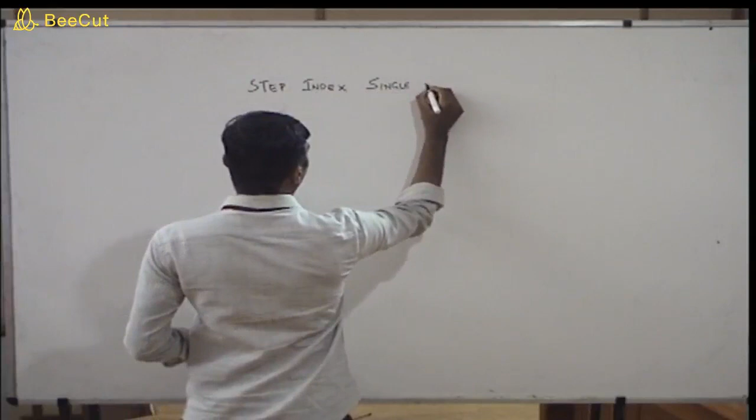Now, in this session, we are going to study about the light propagation through different types of optical fiber and the refractive index profile of the different types of optical fiber. The first one is the step index single mode optical fiber.

The core and cladding are the two basic unavoidable layers of an optical fiber. If you take any optical fiber, it will have a core and cladding, a core with high refractive index and cladding with less refractive index. So I'm going to draw the refractive index profile of a step index optical fiber. As I explained in the previous session, step index refers to the variation in how the refractive index profile varies when you move from the center of the core towards the core cladding region.

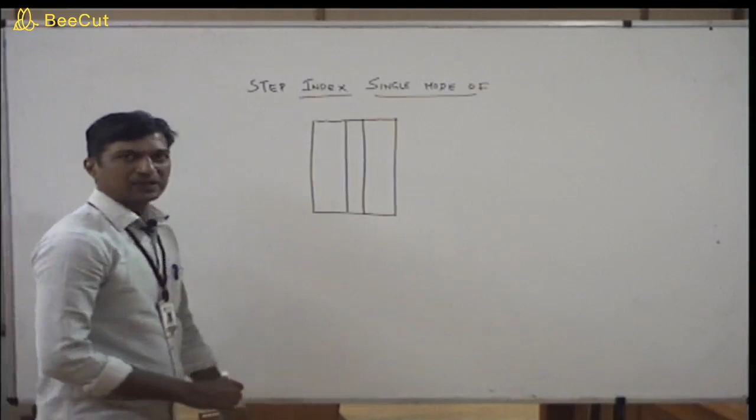I'm going to draw the structure of an optical fiber. So this is an optical fiber. The core and cladding are the two essential layers of an optical fiber because the guiding principle is based on total internal reflection. This is the core of an optical fiber, and the refractive index of the core is represented by N1. This is the cladding of an optical fiber, represented by the letter N2.

When you compare the core index with the cladding index, N1 will be greater than N2. Core is the higher refractive index region, and cladding is the less refractive index region. So this is the optical fiber axis, and this is the radial distance.

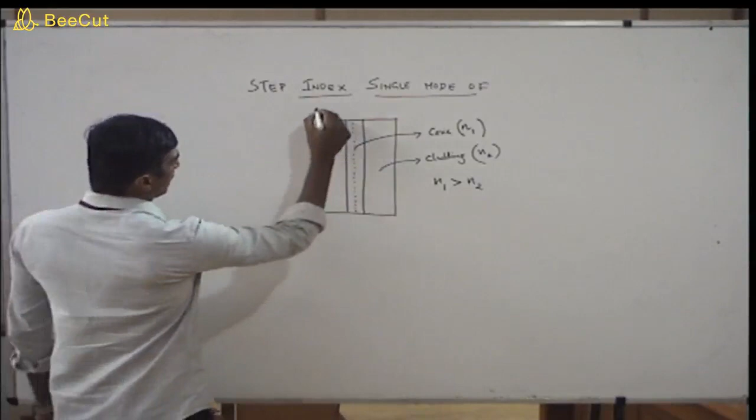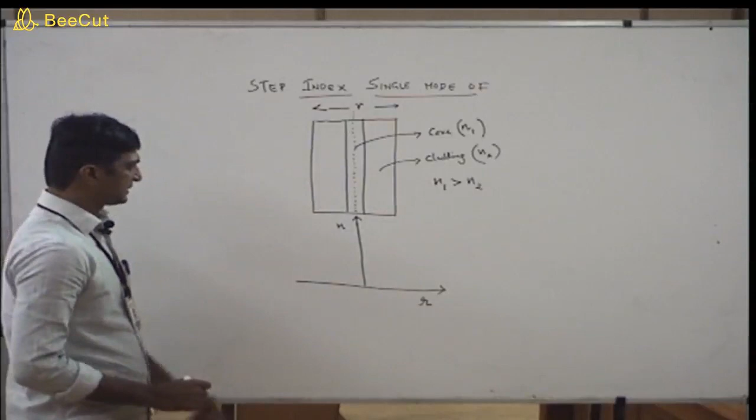Now I'm going to draw the variation in refractive index, how it varies if you move from the center of the core towards the core cladding interface and then from the core cladding interface to the edge of the cladding, for the step index single mode optical fiber. So I have an axis where radial distance is taken along the x-axis and refractive index is taken along the y-axis. This is my origin.

One of the features of the step index single mode optical fiber is that the core has uniform refractive index throughout. As an example, let the core index N1 be 1.5 and the cladding index N2 be 1.4.

If I move radially from the axis of the optical fiber towards the left or right within the core region, the refractive index remains 1.5 because the core has a uniform refractive index throughout. This is the core cladding boundary. So if I move radially from the center of the core towards left and right, the refractive index remains the same, 1.5. On the y-axis, I am going to take this point, and let this point correspond to 1.5.

So throughout the core region, the refractive index is 1.5. If I move towards left or right from the center of the core towards the core cladding interface, the refractive index stays the same, 1.5, so I get a straight line like this. Moving from the center of the core towards the core cladding interface on both the left and right sides, the refractive index remains uniform at 1.5.

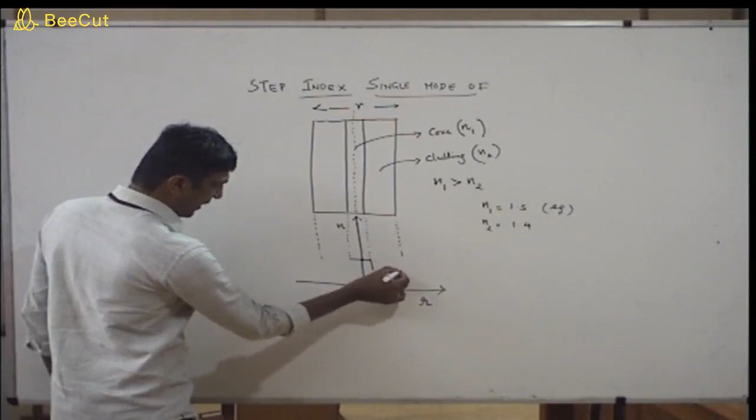Up to the cladding interface, it remains the same. So on reaching the core cladding boundary, the refractive index drops from 1.5 to 1.4. In the cladding region, it has a uniform refractive index of 1.4. So this point corresponds to 1.4, and throughout the cladding region, the refractive index remains 1.4. So from 1.5, it drops on reaching the cladding region.

This is the core cladding boundary, and this is the cladding region. Throughout the cladding, the refractive index is 1.4. Similarly, if you move towards the right, this is the core cladding boundary. On reaching it, the refractive index drops from 1.5 to 1.4, and throughout the cladding region, the refractive index remains the same. So this is the cladding boundary, and this is the cladding boundary.

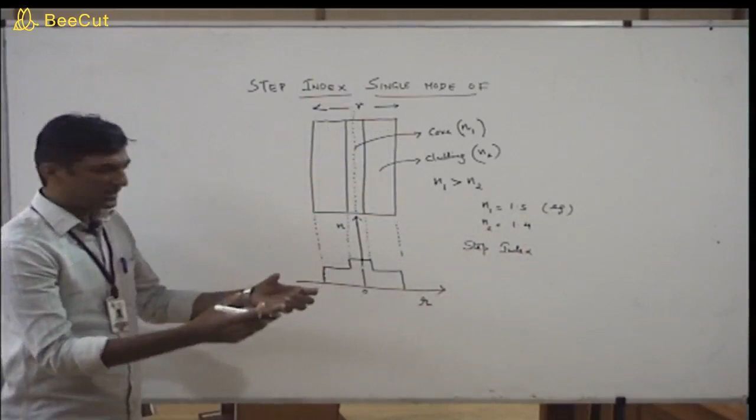So we can see the refractive index profile of the step index single mode optical fiber looks like a step, and hence the name step index fiber. That is the way the refractive index varies as you move from the center of the core towards the core cladding interface, and then from the interface to the cladding boundary. The variation in refractive index looks like a step, which is why it is called step index optical fiber.

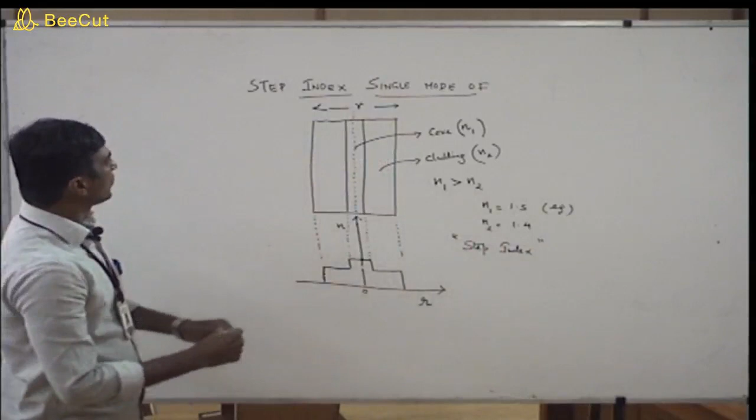And then we are going to study about the path propagation. Now we move to the next point, the single mode optical fiber. Again, we are going to see how light propagates through a single mode optical fiber.

Again, the same structure of the optical fiber. The core should have a very small core diameter. So this is the core region, represented by the letter N1, which is the core index, and N2 is the cladding index.

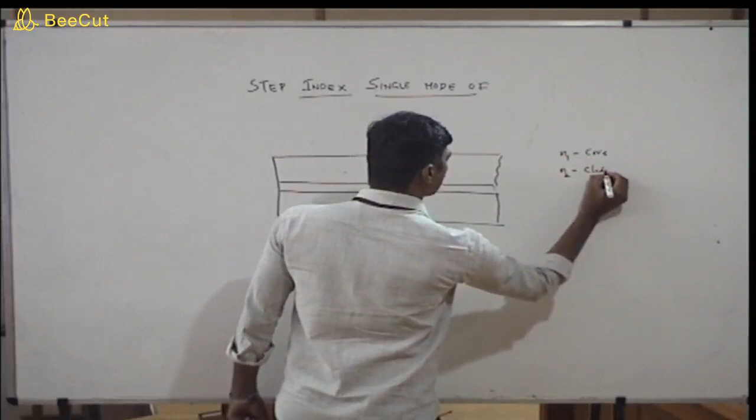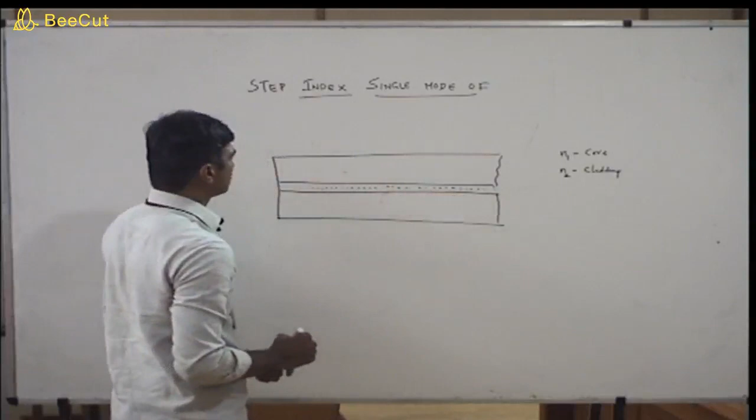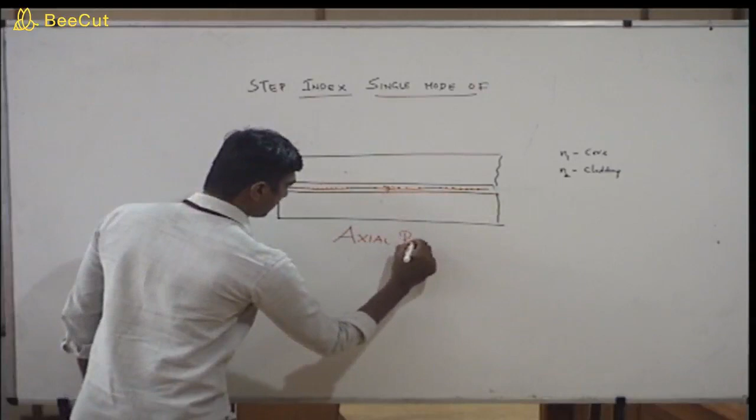This is the axis of the optical fiber, which we call the optical fiber axis. In the case of a single mode optical fiber, there is only one light ray path inside the fiber, and we call that path the axial path, or axial mode.

So this fiber supports only one mode, and hence the name single mode optical fiber. Just summarizing, in the case of a step index single mode optical fiber, the refractive index profile looks like a step, and the fiber supports only one mode.

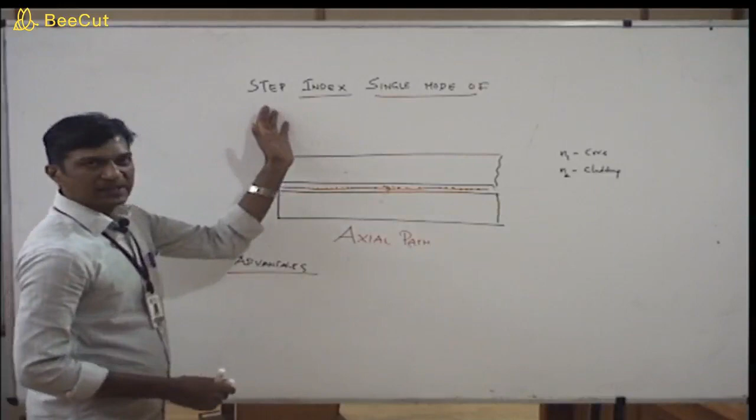One of the advantages of the single mode optical fiber is that it is used for long distance communication, for example intercontinental superhighway communication channels. We use single mode optical fiber because it does not have any significant losses. So we prefer step index single mode optical fiber if the communication channel is lengthier, for intercontinental connections, for the internet, and for the backbone of the internet.

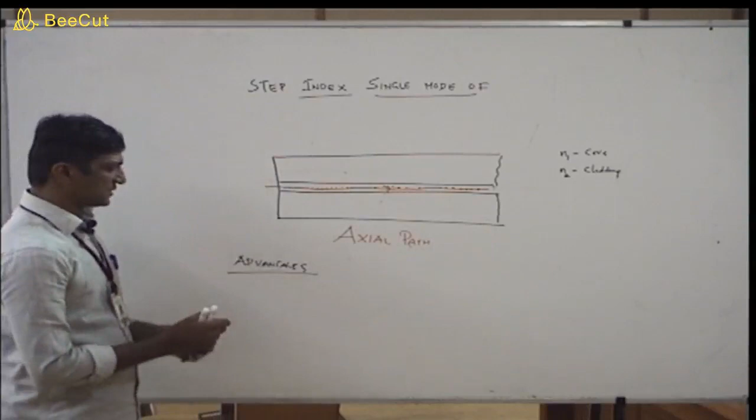Why is it preferred? Because it has low losses. The fiber has minimum losses, and we can transmit data at high speed in the case of a single mode optical fiber.

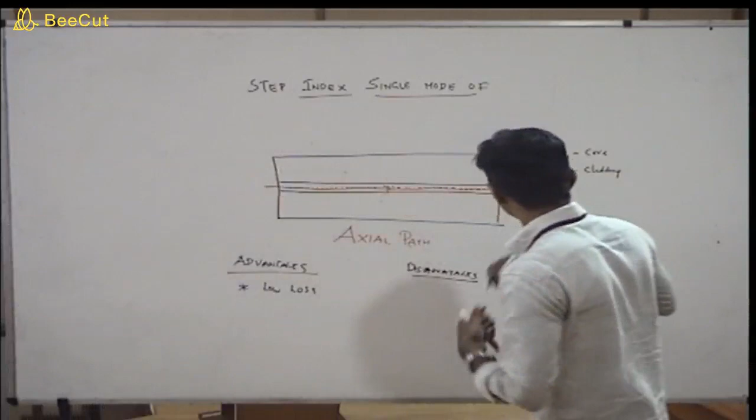And now the disadvantages of the single mode optical fiber. We know this fiber is characterized by a very small core diameter. I think I have not mentioned the core diameter yet - it is 8 to 10 micrometers, which is the typical core diameter range of a single mode optical fiber.

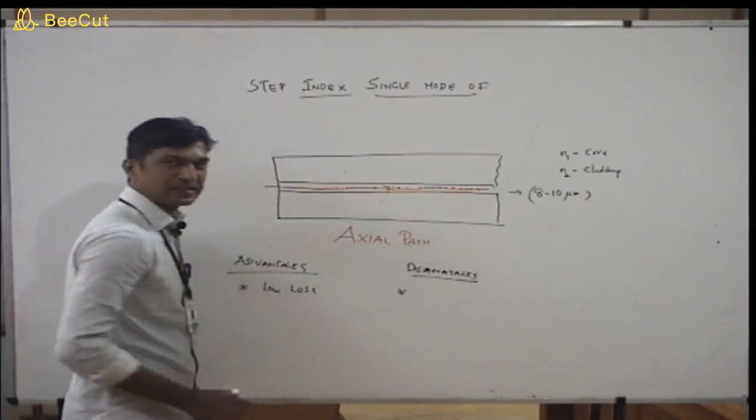When you use this fiber for optical fiber communication, we need to convert information into light, and this light is launched into the optical fiber - that is called coupling. Coupling light into the optical fiber becomes very difficult because of the very small core diameter, so we have to use a coherent light source such as a laser. Also, joining two optical fibers is very difficult - we call this process splicing and coupling.

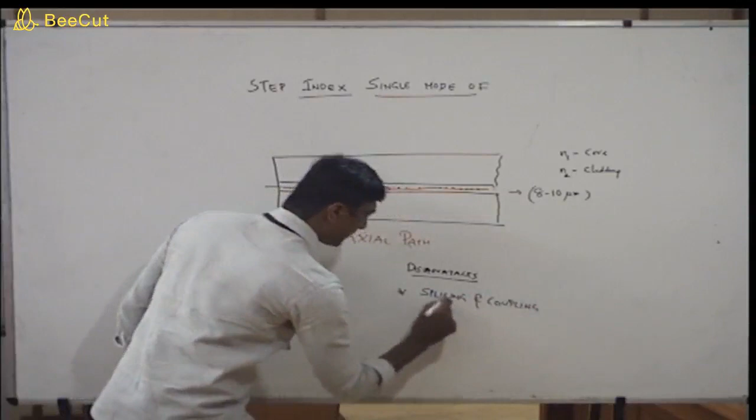Splicing means joining two optical fibers together, and coupling means joining light with an optical fiber. Splicing and coupling is very difficult in the case of a single mode optical fiber. So these are the disadvantages of a single mode optical fiber.

Next, we are going to discuss the light propagation and refractive index profile of a multi-mode step index optical fiber.

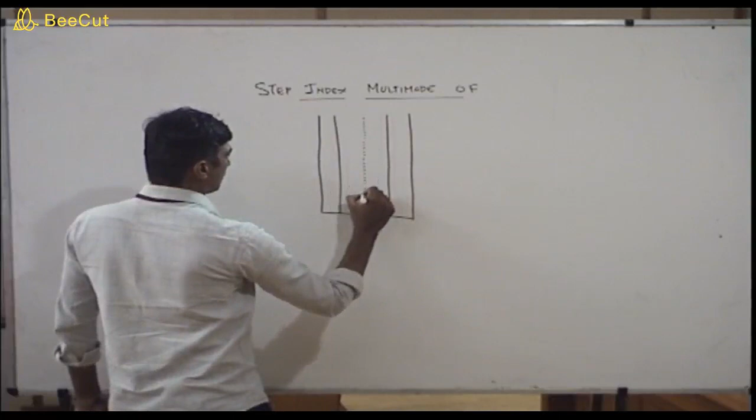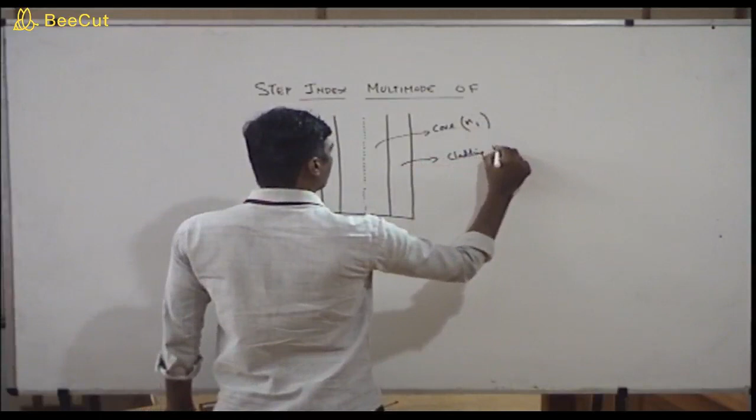First we discuss the refractive index profile of a step index optical fiber. I'm going to draw the structure of a multi-mode optical fiber. This is the core, represented by N1. This is the cladding, represented by N2, with N1 greater than N2. Core is the higher refractive index region and cladding is the lower refractive index region.

Compared to the step index single mode optical fiber, the step index multi-mode fiber has a very large core diameter. You can see the core diameter is very big in the case of a multi-mode step index optical fiber. Now I'm going to draw the variation in refractive index profile.

We are going to draw how the refractive index profile varies as we move from the center of the core towards the core-cladding interface, and then to the cladding boundary. The y-axis is refractive index and the x-axis is radial distance. Let the refractive index of the core be 1.5 and the refractive index of the cladding be 1.4.

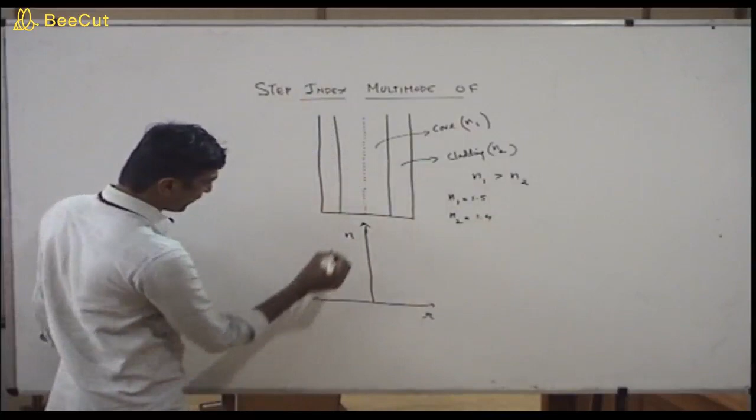Throughout the core region, the refractive index is 1.5. If you move from the center of the core towards the core-cladding interface, towards the left and towards the right, the refractive index is the same. This point corresponds to 1.5 on the y-axis, and this point corresponds to 1.4. Throughout the core region the refractive index is the same, 1.5, so I get a straight line.

This is the core-cladding boundary. Throughout this core region, from the center of the core towards the core-cladding region, the refractive index is uniform at 1.5, so I get a straight line. On reaching the core-cladding interface, there is a slight drop in refractive index, from 1.5 it drops to 1.4. You can see the refractive index profile suddenly drops from 1.5 to 1.4, and it continues till the cladding boundary.

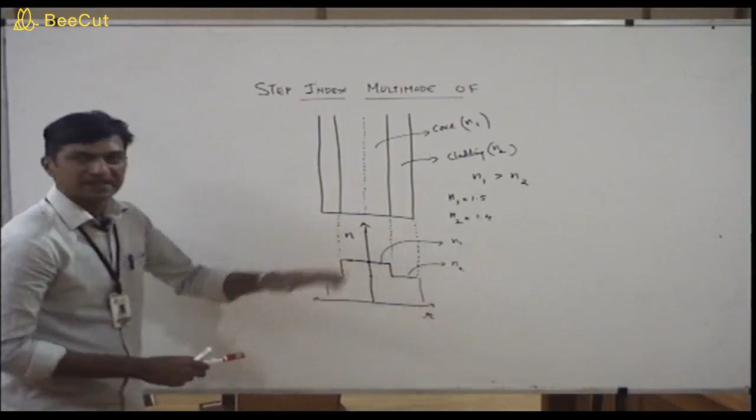Similarly, towards the left, the refractive index is 1.4. So we can see this is the refractive index of the core, N1, and this is the refractive index of the cladding, N2. The core and cladding refractive index variation looks like a step, and hence the name step index fiber.

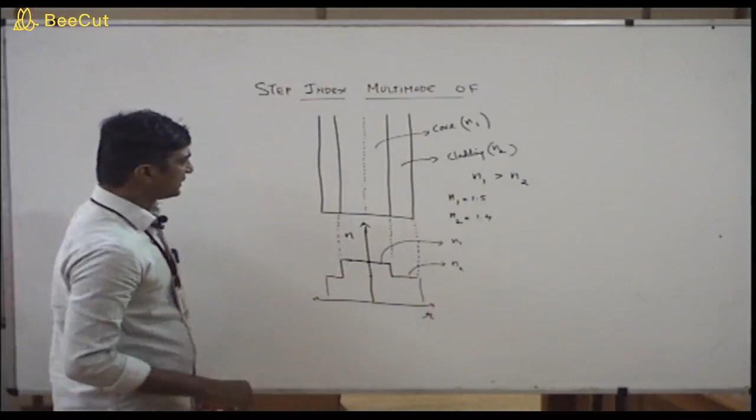Both step index single mode optical fiber and step index multi-mode optical fiber share this common feature: the profile looks like a step. But one difference is the step width. Single mode optical fiber has a very small step width, and multi-mode optical fiber has a very large step width.

Another difference is the diameter. Core diameter is very large in the case of a multi-mode optical fiber, and core diameter is small in the case of a single mode optical fiber.

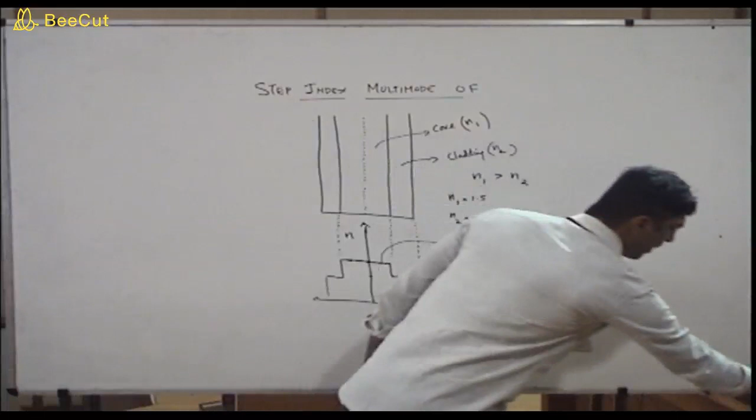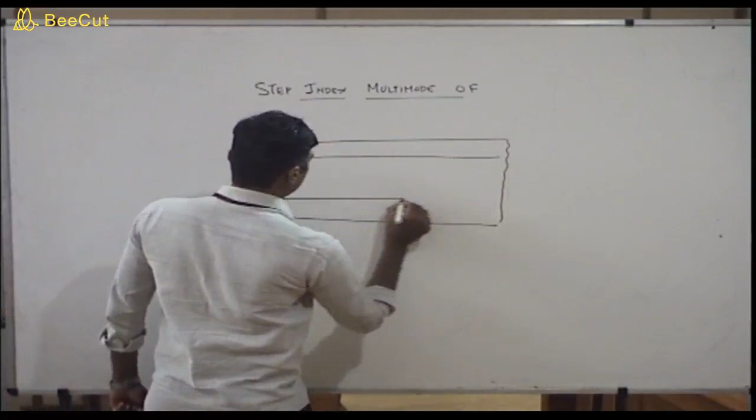Now we can see how light propagates through a step index multi-mode optical fiber. I'm going to draw the optical fiber. This is the optical fiber, with a core and a cladding. This is the optical fiber axis. This is my core with index value N1, and this is my cladding, with refractive index N2.

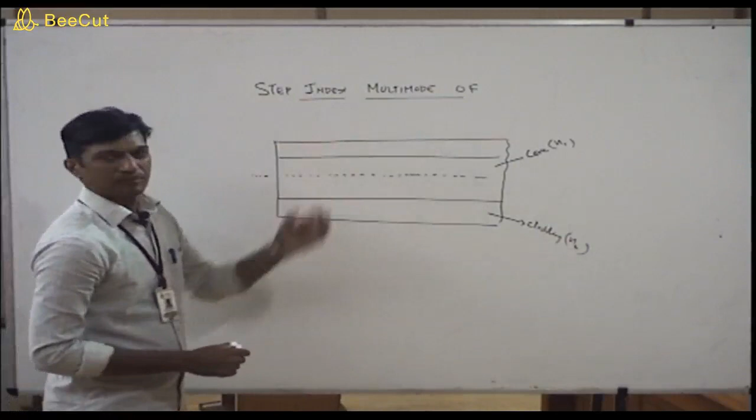As the name multi-mode suggests, this fiber will support many modes. Light can travel through the axis of the fiber. If it is traveling through the axis of the fiber, it is termed the axial mode.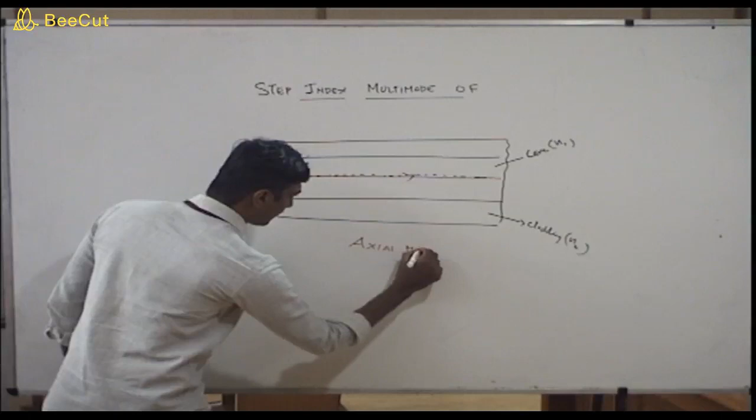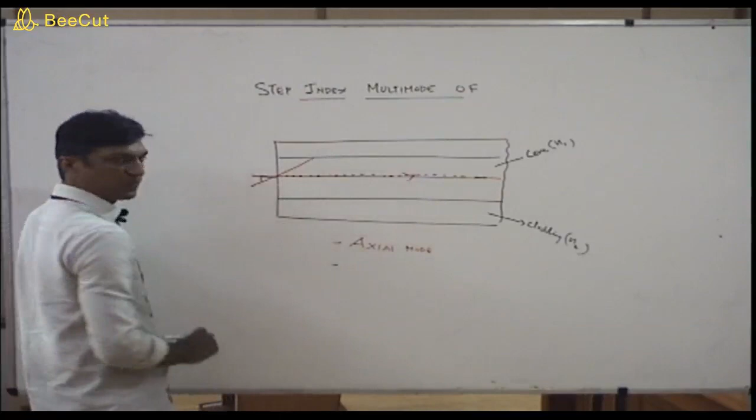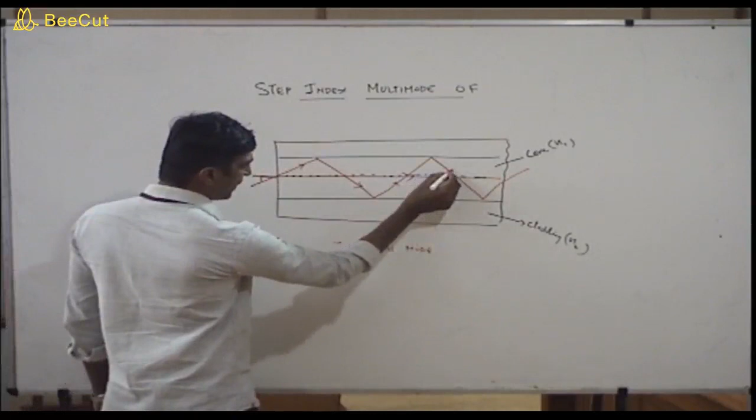Another mode supported by the fiber is the lower order mode, which makes a small angle with the fiber axis. This is called a lower order mode, and after making few reflections inside the fiber, it will emerge out at the other end. So this is the light propagation of a lower order mode, which makes few reflections inside the fiber.

Another mode supported by the multi-mode optical fiber is the higher order mode, which on entering the fiber makes many reflections inside it. After making many reflections inside the fiber, it will be emerging out of the fiber.

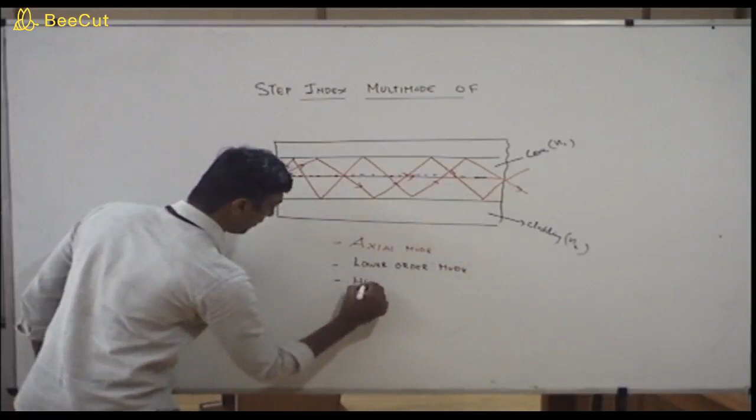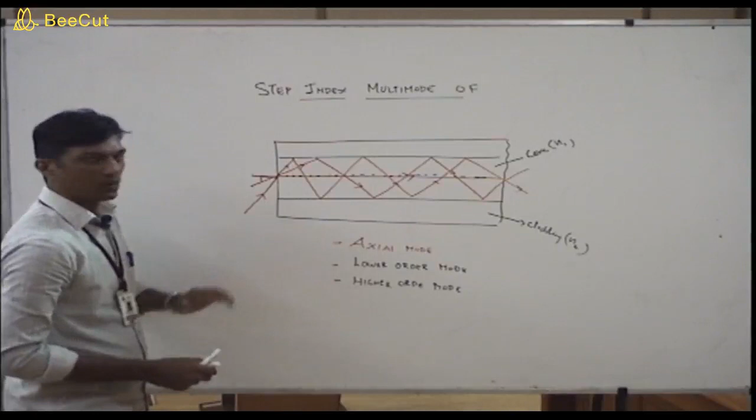Summarizing, the modes supported by the multi-mode optical fiber are: axial mode, lower order mode, and higher order mode. So these are the modes that are supported by the multi-mode optical fiber.

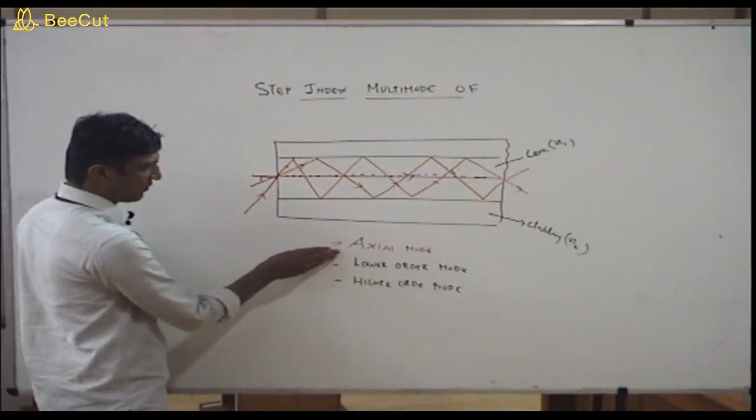The variation in refractive index looks like a step, and that is why it's called step index fiber. Multi-mode refers to the paths supported by the fiber; it can support multiple modes. The light can travel along the axis, and there is a lower order mode and a higher order mode.

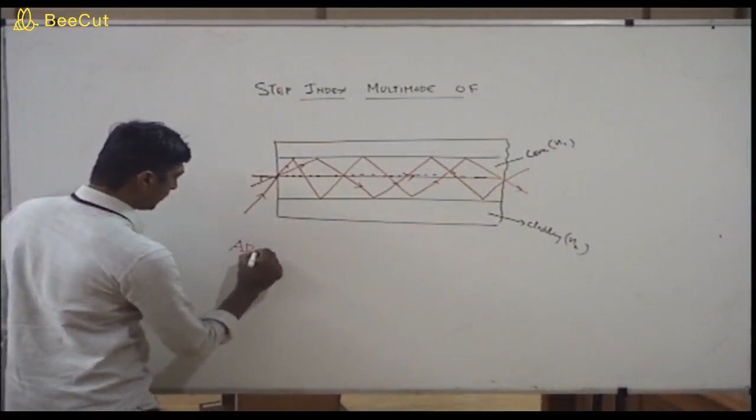Now, one of the advantages of this multi-mode optical fiber, a few advantages of this multi-mode optical fiber, is that coupling and splicing is easy.

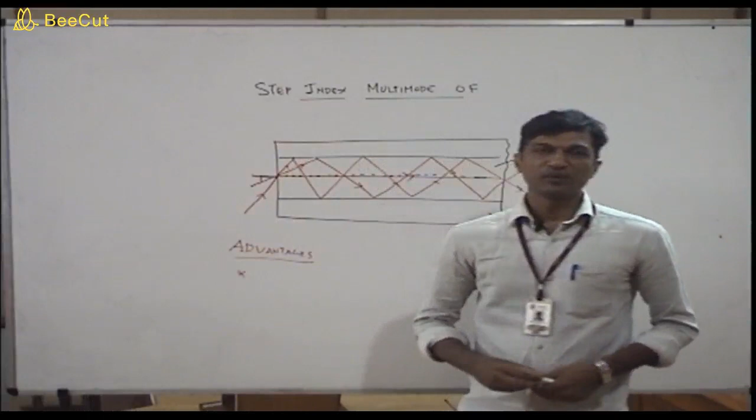I have explained earlier that splicing means joining two optical fibers together. For example, if you want to build an optical fiber communication channel of 400 kilometers length, we need to join optical fibers together to meet the required length.

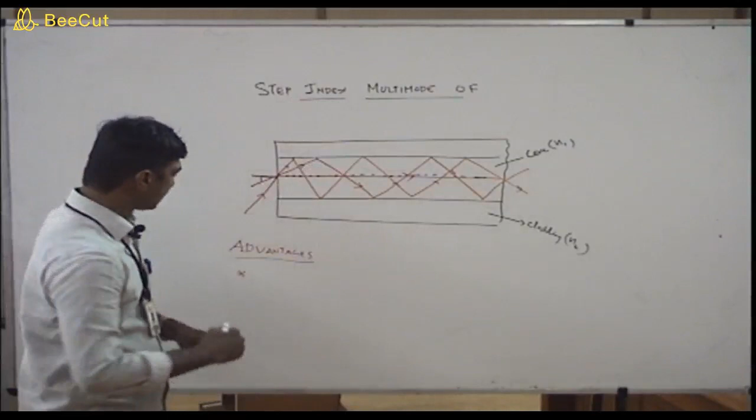In such cases, we need to splice two optical fibers together. So splicing of step index multimode optical fiber is easy. Splicing and coupling: coupling means joining the optical fiber with a light source. The splicing and coupling is easy.

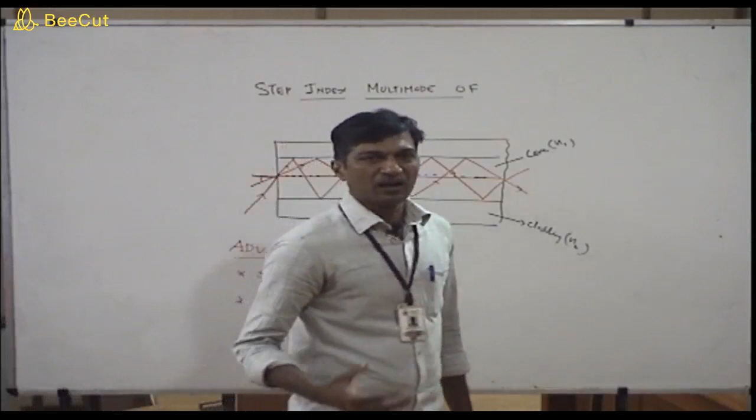Because of the large core diameter, we can use LED as a light source. We know optical fibers can transmit signals only in the form of light, so we need to convert all information into light format. So you can use LED as the light source. These are the advantages: splicing and coupling is easy, and LED can be used as a light source.

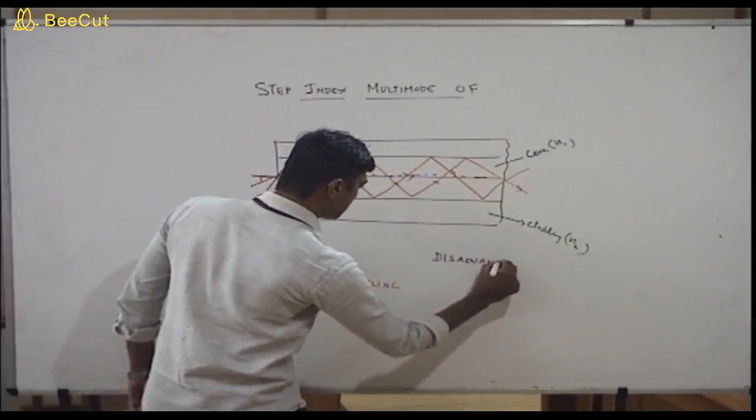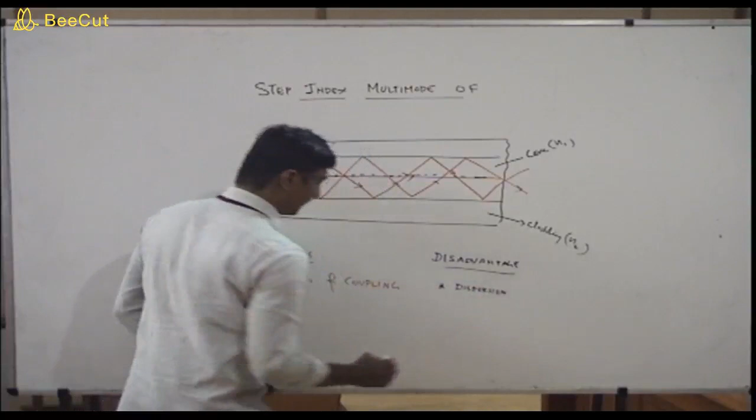One of the disadvantages of the step index multimode optical fiber is that it has loss, dispersion loss, which arises due to the different modes supported by the fiber.

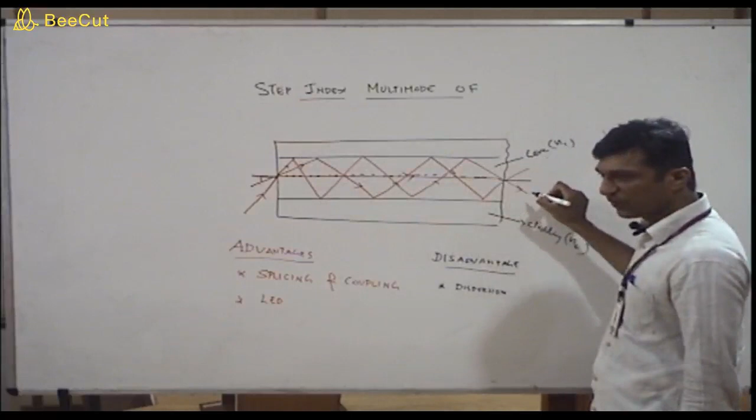All this light enters the optical fiber, but due to different axial speeds, the axial mode comes first, then the lower order mode, and then the higher order mode. Because the axial mode makes no reflection inside the fiber, it reaches the other end of the fiber first, then comes the lower order mode which makes few reflections, and then the higher order mode which makes many reflections inside the fiber.

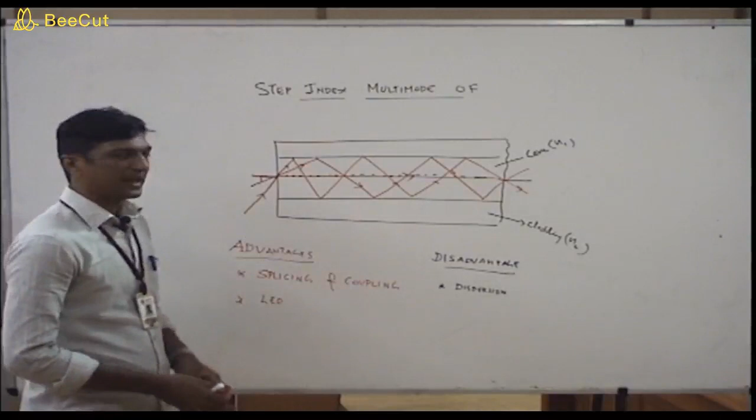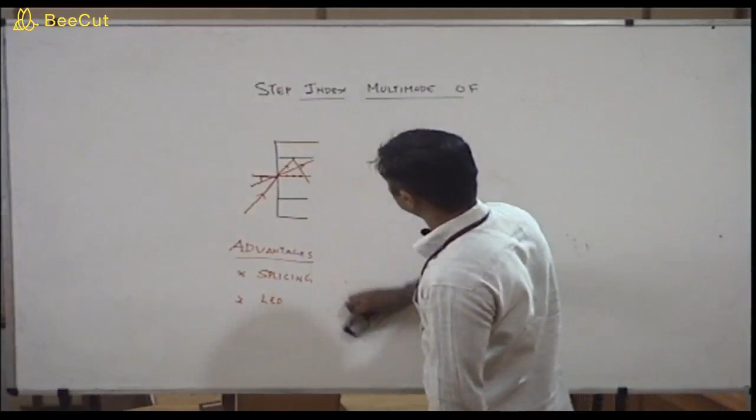Due to this there is a mismatch between input and output, which we call dispersion losses, known as intermodal dispersion, arising due to the different speeds of the light ray paths inside the fiber. So this is all about the step index multimode optical fiber, and we are going to discuss the last type of fiber, the graded index multimode optical fiber, also called multimode graded index optical fiber.

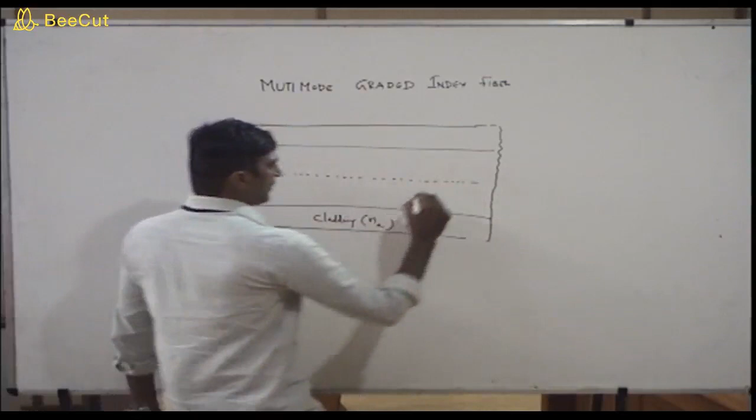This is the structure of a graded index fiber. This is the axis of the fiber, and this is the cladding region, represented by the letter N2, the refractive index. And taking the core,

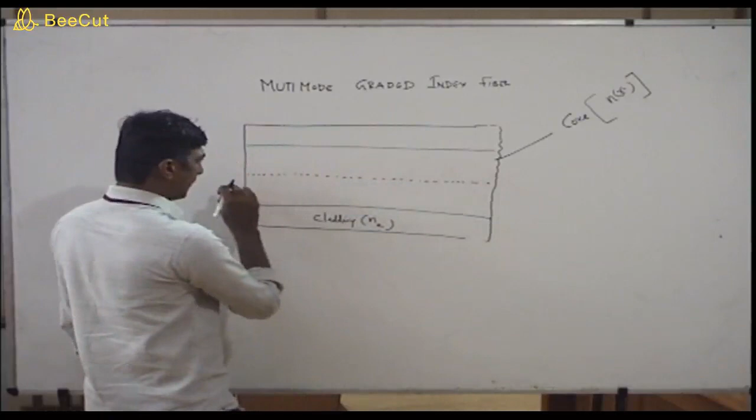the core refractive index is a function of R, meaning the refractive index of the core varies. That is why it is called gradation; it's not the same throughout. For example, if you take the refractive index value at the center of the core, let it be 1.5, and the cladding region has a refractive index of 1.4.

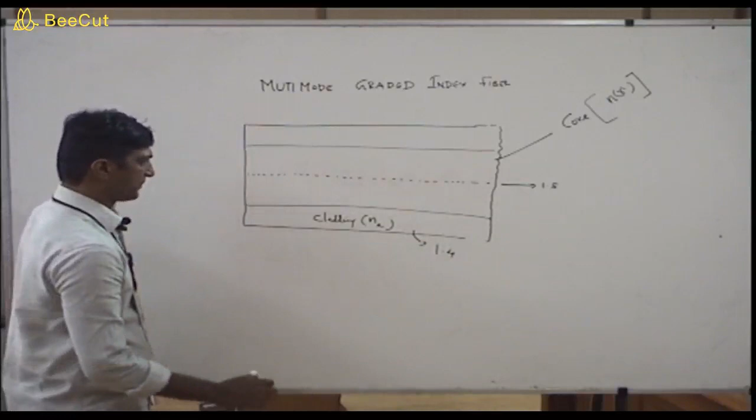At the center of the core, the refractive index value is 1.5. If I take another point, the refractive index value will be 1.49. Likewise, over here, the refractive index is 1.49. Over here, the refractive index variation, this is the refractive index value, it is 1.48. This point's refractive index is again 1.48. Likewise, it keeps on decreasing, and on reaching the cladding, the refractive index becomes 1.4.

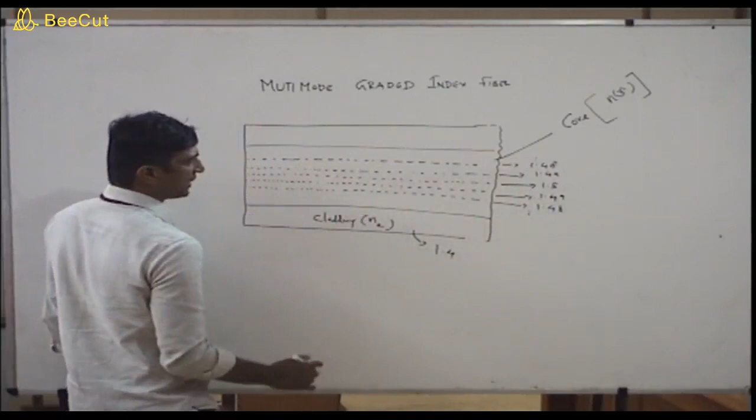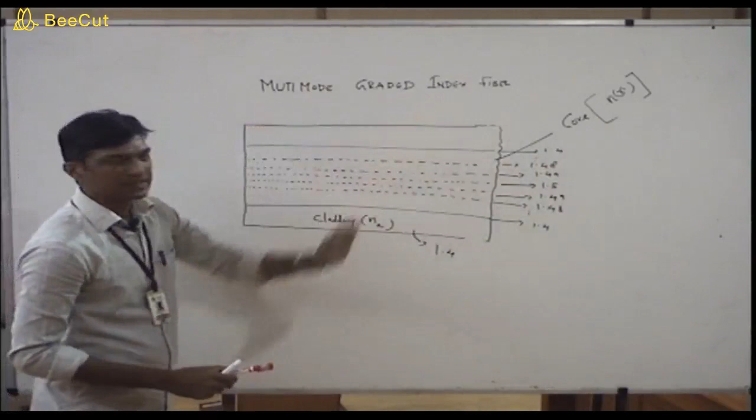So we can see that in the case of a multimode graded index optical fiber, the refractive index is maximum at the center. If you move up from the center of the core towards the core cladding region, the refractive index is decreasing gradually. There is a gradation in refractive index, which is why it is called graded index fiber. Refractive index is maximum at the center and it decreases.

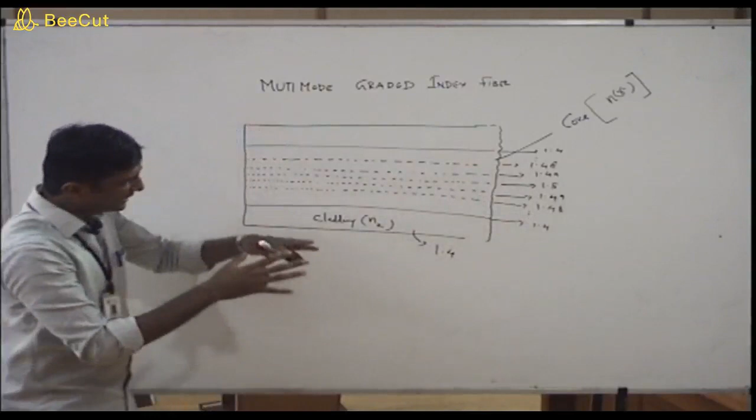If you move down from the center of the core towards the core cladding region, the refractive index is decreasing. So there is a gradual decrease in refractive index, hence the name graded index optical fiber. The index value is maximum at the center and decreases as we move from the center of the core towards the core cladding region.

We're going to draw the profile of the graded index optical fiber. So this is my optical fiber. This is my core, whose refractive index depends on radial distance, a function of r. This is the cladding, which has a uniform refractive index throughout. And this is my axis of the fiber.

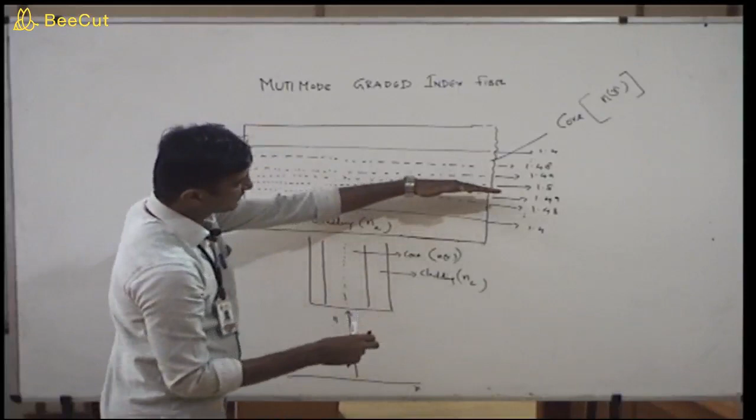So I'm going to draw the variation in refractive index. This is my y-axis and this is my x-axis. The y-axis is the variation in refractive index and the x-axis is the radial distance. At the center, we know the refractive index is maximum, corresponding to 1.5. So I'm going to take a point on my y-axis.

This point corresponds to 1.5 at the center, so this is my origin. At the center, the refractive index is 1.5. If I move from the center towards the core cladding interface, the refractive index is decreasing: 1.5, 1.49, 1.49, 1.48, 1.48 and so on. When it reaches the core cladding interface, the refractive index becomes 1.4. So there is a gradual decrease in refractive index.

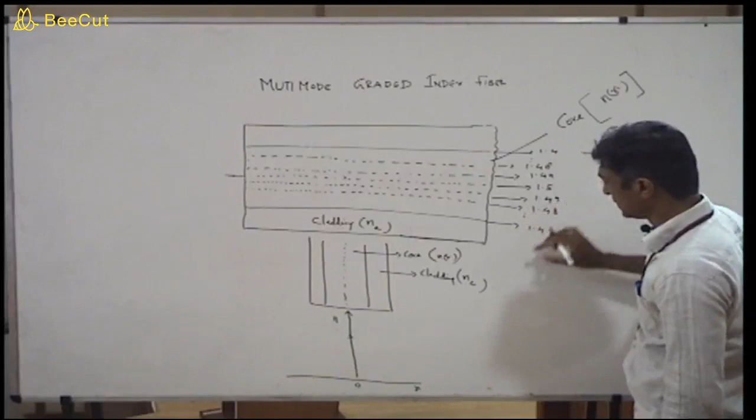If you move from the center of the core towards the core cladding region, either to the left or right, the refractive index decreases, and that decreasing process continues till the core cladding interface. So this is how it varies — a gradual decrease in refractive index as you move radially from the center of the core towards the core cladding interface. At the center, the refractive index is maximum, and it decreases as you move towards the core cladding interface. So this is the profile.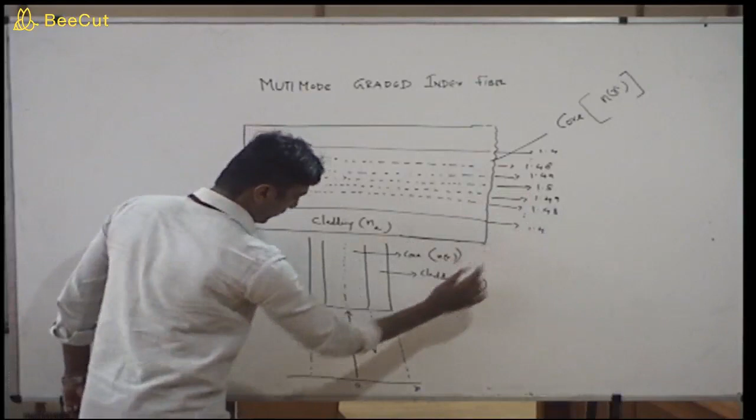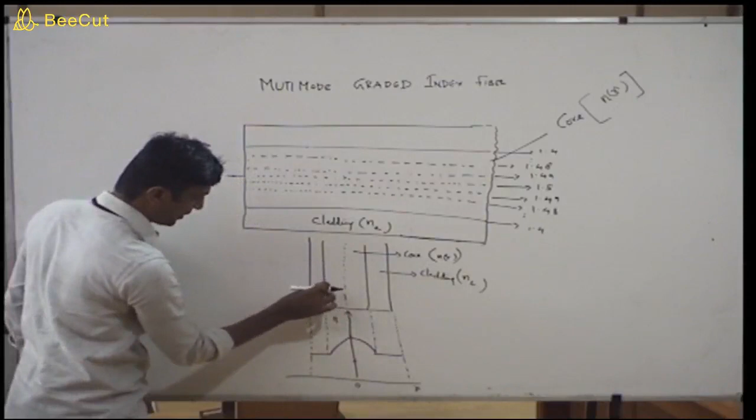Now, when the core cladding boundary is reached, the refractive index becomes 1.4, and throughout the cladding region, the refractive index stays 1.4. So I'm going to draw the cladding boundary. On reaching the cladding boundary, the refractive index drops to 1.4. So I'm going to take this point as 1.4. On either side, throughout the cladding region, the refractive index value is 1.4.

So this is called a parabolic profile. As I explained earlier, the refractive index profile, showing how it varies when you move radially from the center of the core towards the core cladding region, looks like this — it is a parabolic profile.

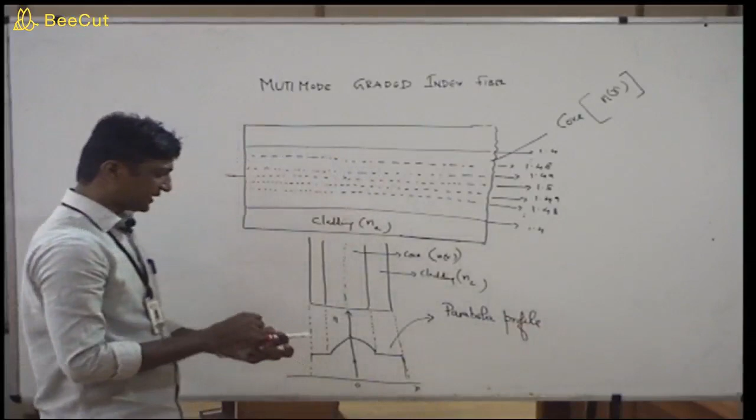Parabolic profile, so the refractive index profile is parabolic. Now we are going to see how light propagates through a multi-mode graded index optical fiber.

One of the disadvantages of multi-mode step index fiber is intermodal dispersion, which has been minimized or totally avoided in this multi-mode graded index optical fiber.

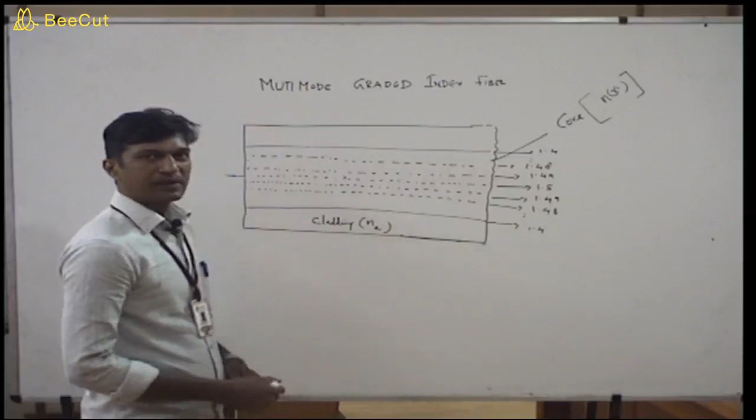Before going into the detail of light propagation in the multi-mode graded index fiber, you should know the basic light rule: what happens when light travels from denser to rarer medium, and what happens when it travels from rarer to denser medium.

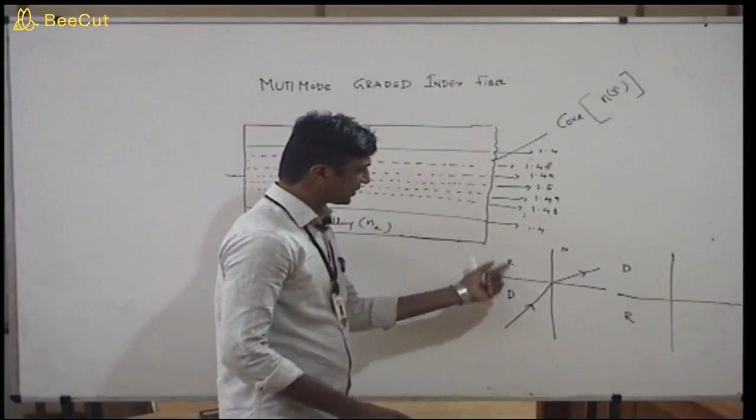We know that when light travels from a denser medium to a rarer medium, the light ray bends away from the normal during refraction. And if light is traveling from a rarer medium to a denser medium, it bends towards the normal. So this is the propagation of light in two different media: denser to rarer, and rarer to denser.

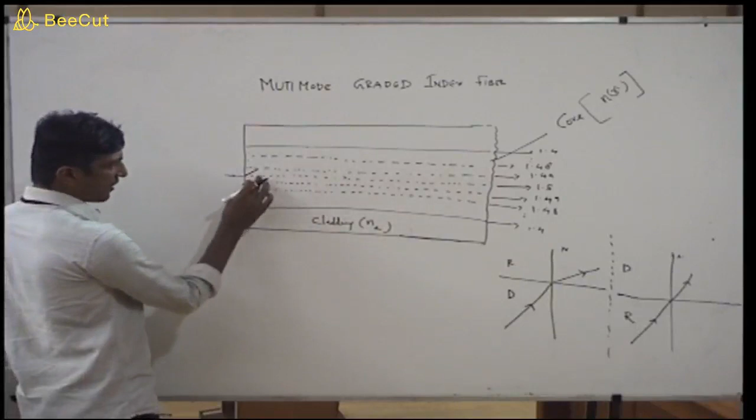Now in the case of a multimode graded index optical fiber, the entering light continuously travels from a denser to rarer medium. We know that when light travels from denser to rarer media, it bends away from the normal. So refraction happens again and again as it travels from a denser to rarer medium.

Refractive index is 1.49, then 1.48, so again it is traveling from a denser to rarer medium, and again the light bends away from the normal.

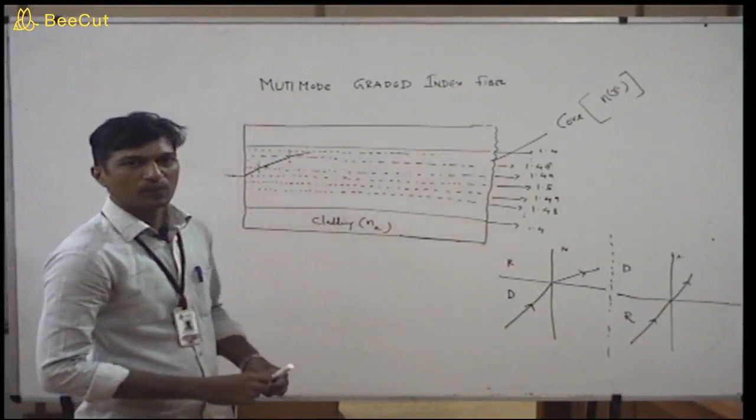On reaching, or before reaching, the core-cladding interface, the condition for TIR occurs. We know one of the guiding mechanisms of optical fiber is total internal reflection, and that can happen on reaching the cladding or before reaching it. Here it happens before reaching the cladding interface, so total internal reflection occurs, and the light is reflected back into the medium itself.

So now the reflected light is traveling from a rarer to a denser medium. What happens to the light? It bends towards the normal.

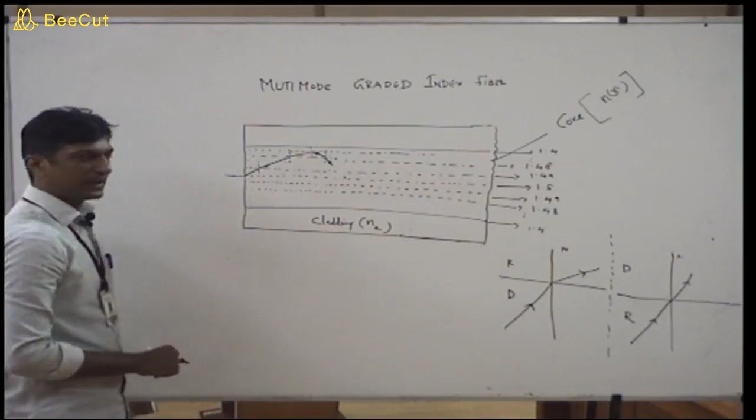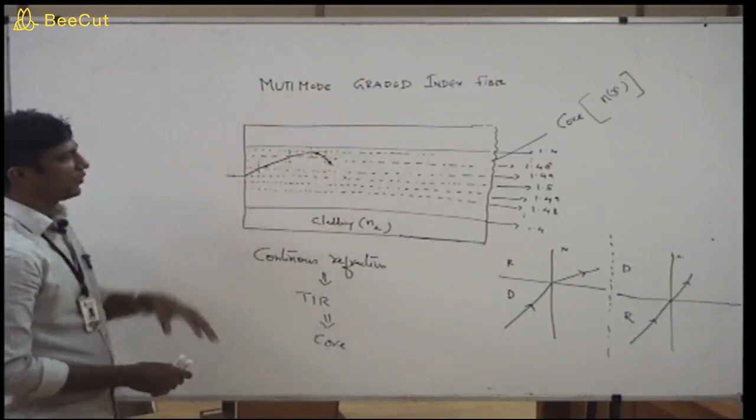So the propagation mechanism in the case of a multimode graded index fiber is continuous refraction followed by TIR towards the core, towards the center of the core. This is the guiding principle, and this TIR can happen on reaching the core-cladding interface or before reaching it.

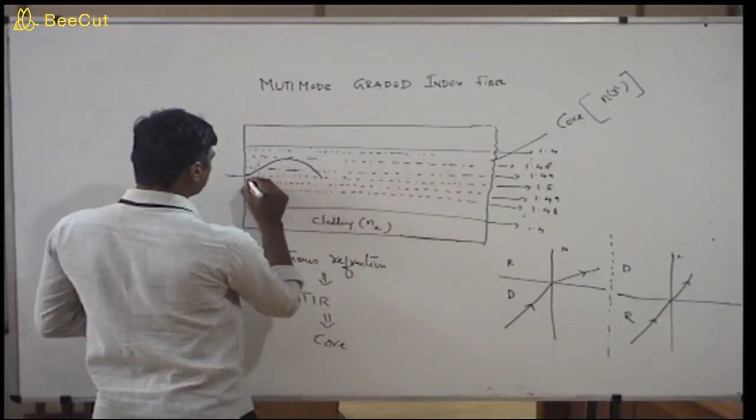So this will be the path of light inside the fiber. It supports many modes - this is the light ray path inside the fiber. This is the axial mode, which has no refraction at all, this is the lower order mode, and this is the higher order mode. So this is the light ray path inside the multi-mode graded index fiber.

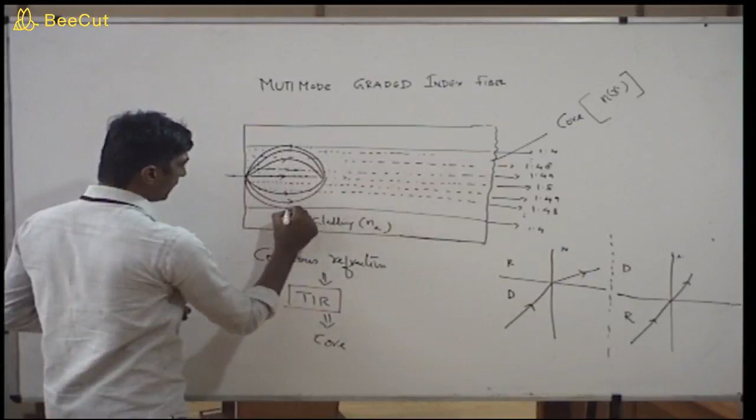I'll repeat once again: the guiding principle in the case of a multi-mode graded index fiber is continuous refraction, arising due to this special graded index profile, followed by TIR towards the core. This TIR can happen on reaching the core-cladding interface or before reaching it. So this is the guiding mechanism in the case of a multi-mode graded index optical fiber.

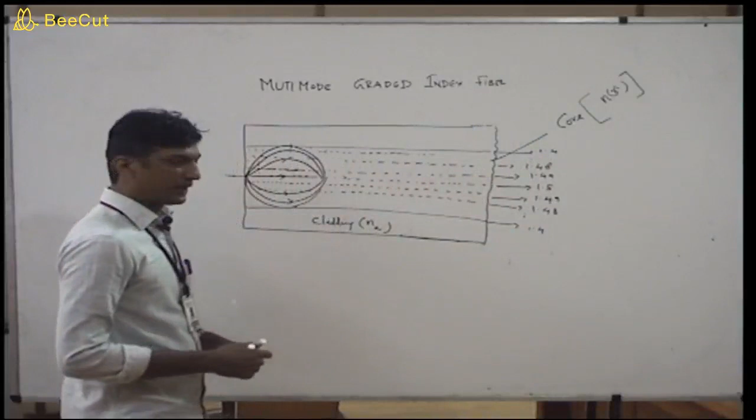I'm going to discuss the advantages and disadvantages of this multi-mode graded index fiber. These are the advantages.

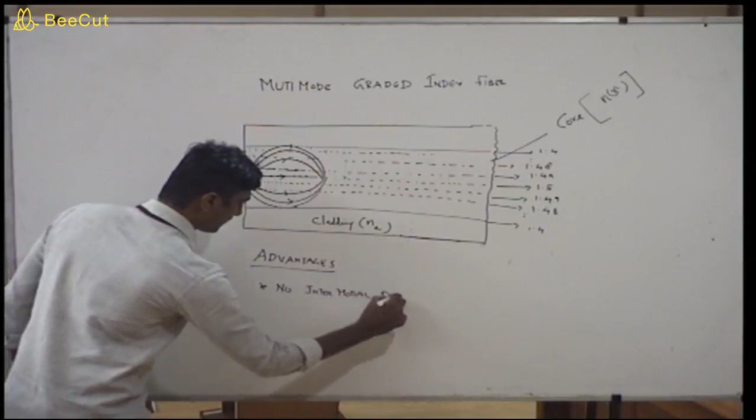Because of this parabolic profile, there is no intermodal dispersion. We know this type of dispersion arises due to the different speeds of light in the fiber. Because of the parabolic profile, all light ray paths take the same time to travel a particular length inside the fiber, so there is no intermodal dispersion.

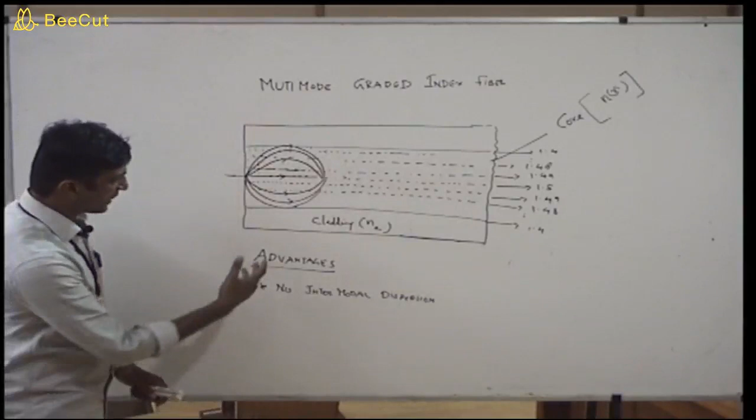As for fabrication, there is a disadvantage: it's difficult to make this multi-mode graded index fiber.